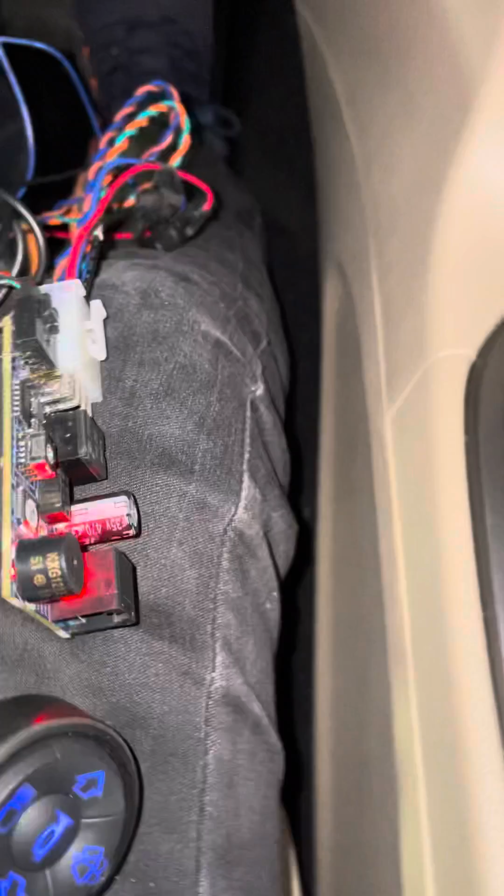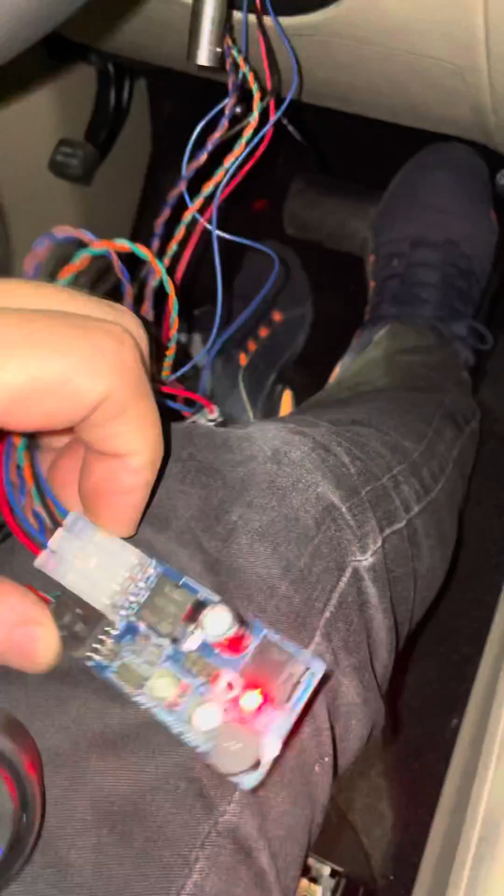Here I'm going to show it. Today it's installed in the Jeep, which is basically the Jeep Grand Cherokee, Pacifica, Dodge Ram, and many types of these cars based on this. What I'm going to show here is the CANbus module. It's a very small one, tiny little box, which includes hundreds of types of cars. And this is the box, very small, like a matchbox.

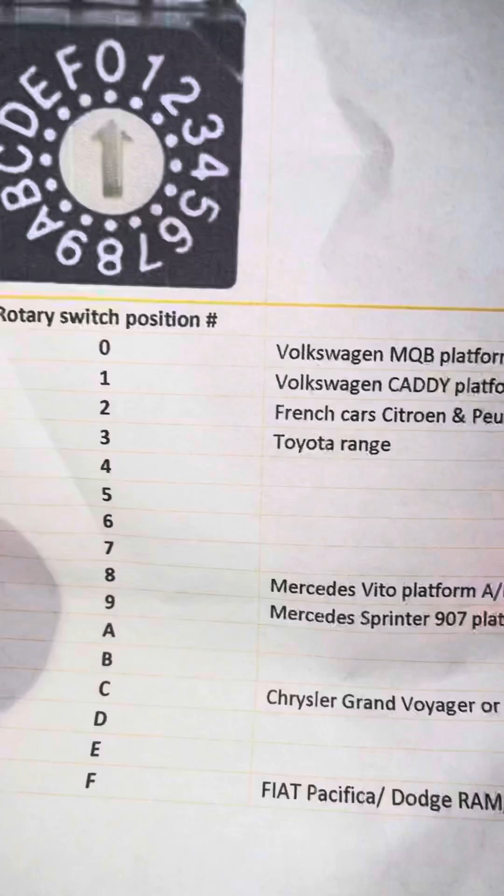What I'm going to show also is that you need to select here. In this module there is the rotary switch, and the rotary switch has 16 positions from 0 to F, and by using a standard flathead screwdriver, we just insert it here and select. Now the selection is according to a list which was made. This is just an example. So basically this is the rotary switch on the board, and we can see the numbers from 0 to F.

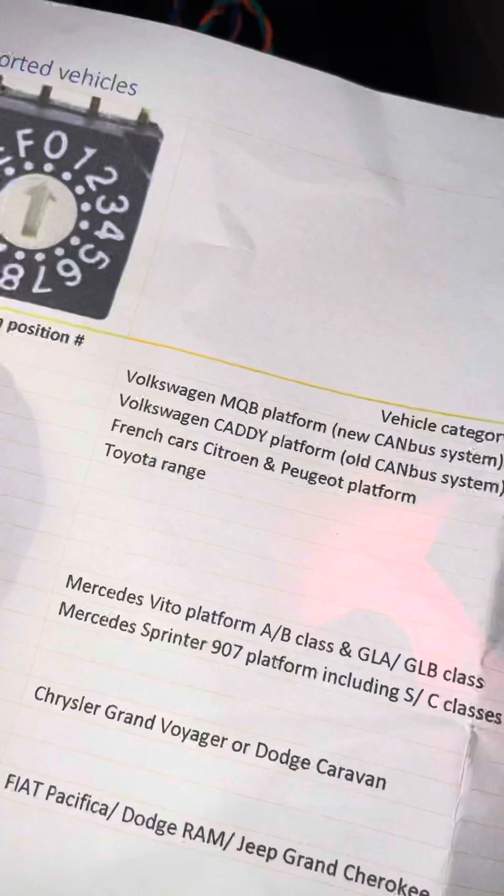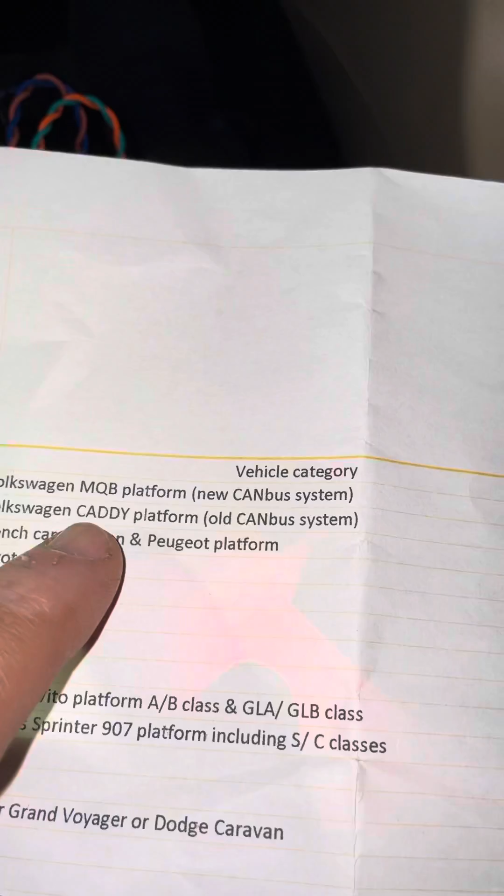So if we look at number 0, by default, the manufacturer default is Volkswagen MQB platform, which is basically thousands of types from Volkswagen. Or the same thing here for the old version of Volkswagen, which is the Caddy platform, as we call it, and this also includes thousands of types.

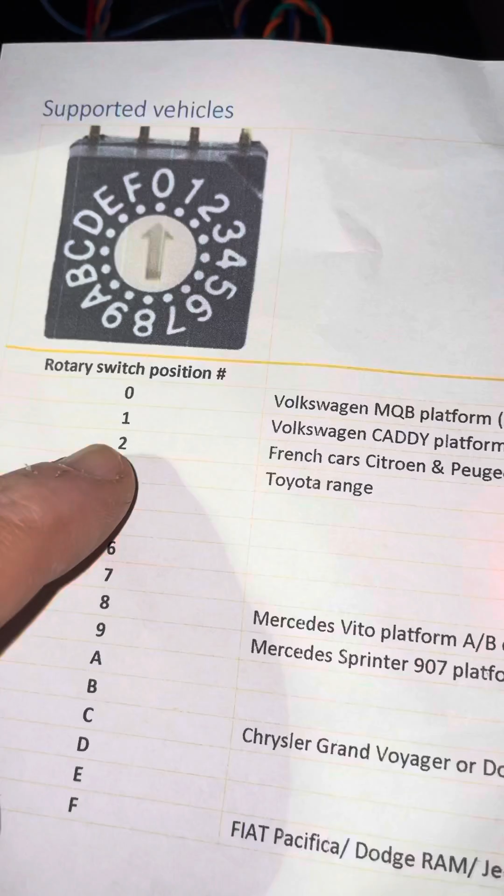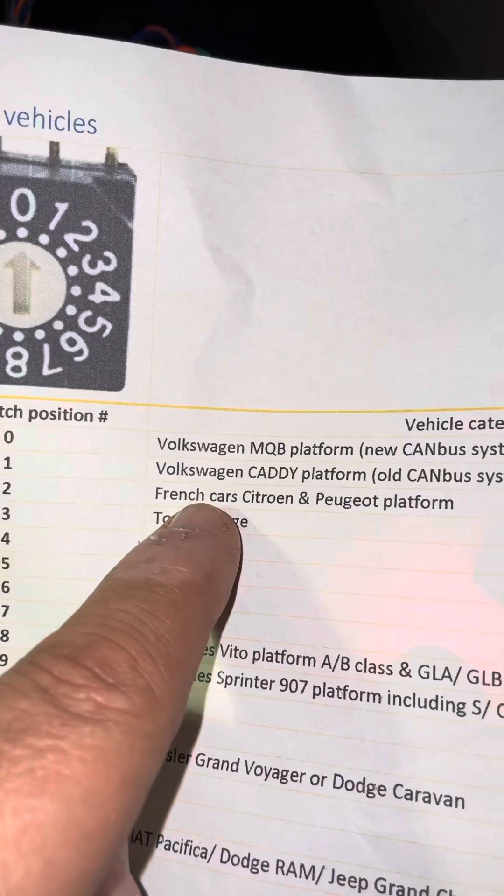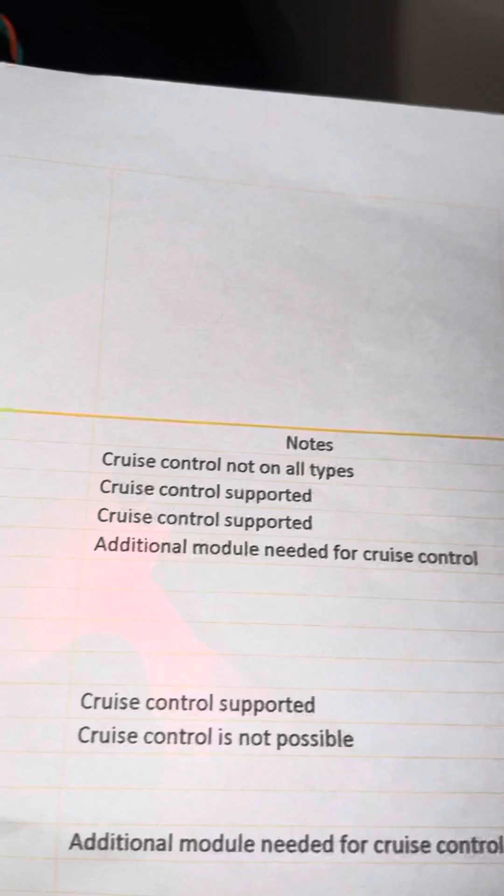For example, number 2, if we set the rotary switch to 2, this supports all French cars and some of the new Toyota, like the new Toyota Pro-Ace and Pro-Ace City. Number 3 is Toyota, but this is a different CANbus than the Toyota, and these are based on the French cars. French cars support almost all cars starting from 2008 until today, but they are all the same, and even some functions, according to the list, like cruise control, are supported in the module.

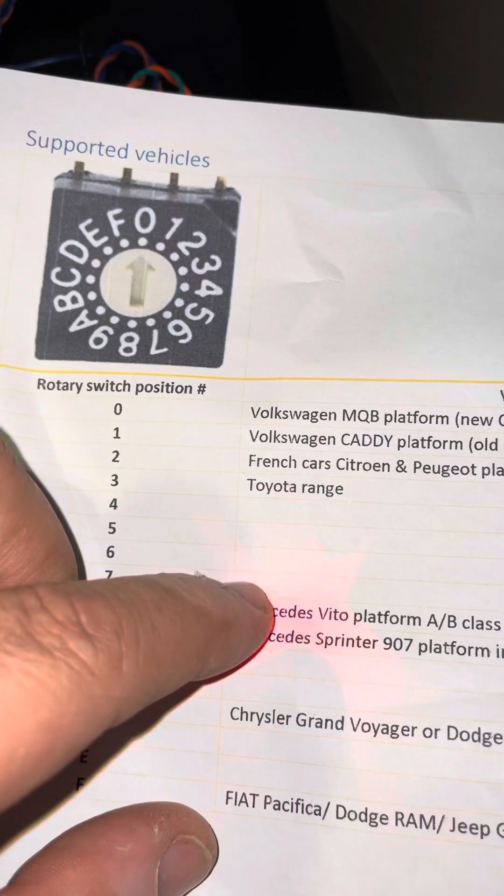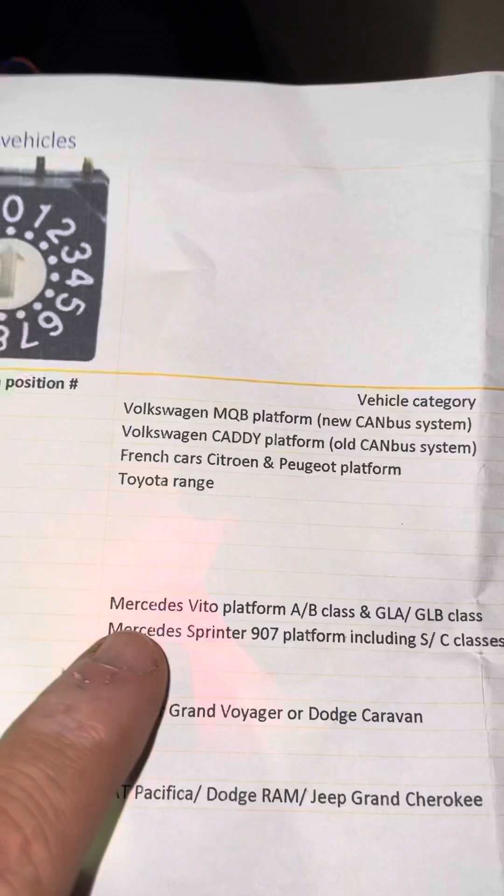If we continue here on the list, these are future ones which we will have to wait and see what's going on in this car industry. And if we look at number 8, for example, in Mercedes, it's the Vito platform, A, B class, and GLA, GLB, and there are loads of cars based on these platforms, like the Vito platform.

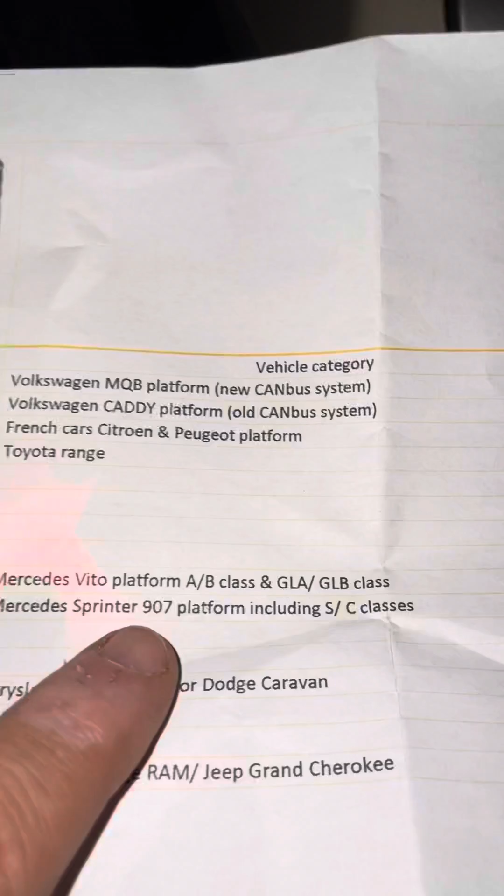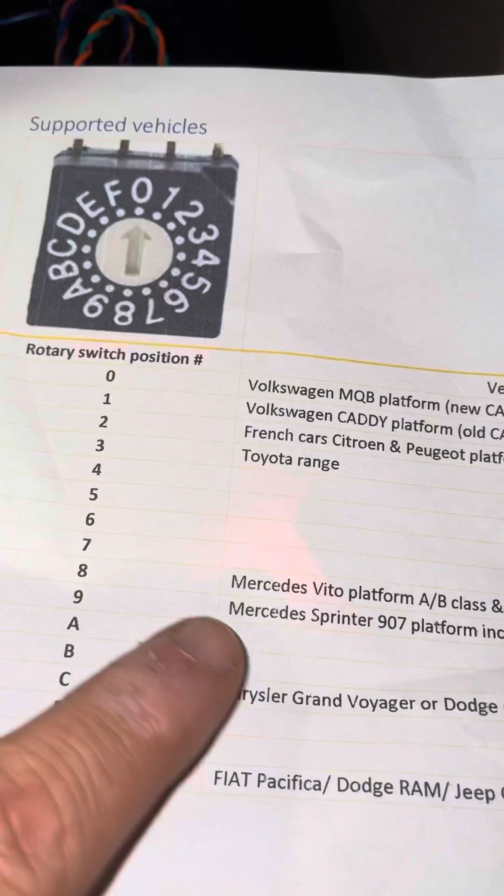If you look at number 9, all these are supported in this little module. Number 9, for example, supports the Mercedes 907, the Sprinters, the S class and the C class, like 220, 300E, and all these classes. So all these are supported here, which is basically loads, almost all cars from Mercedes, in one little box, in this matchbox.

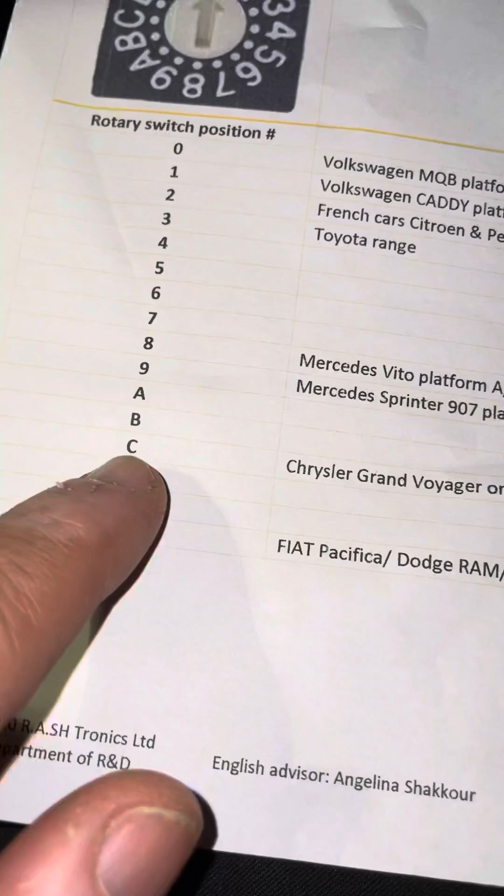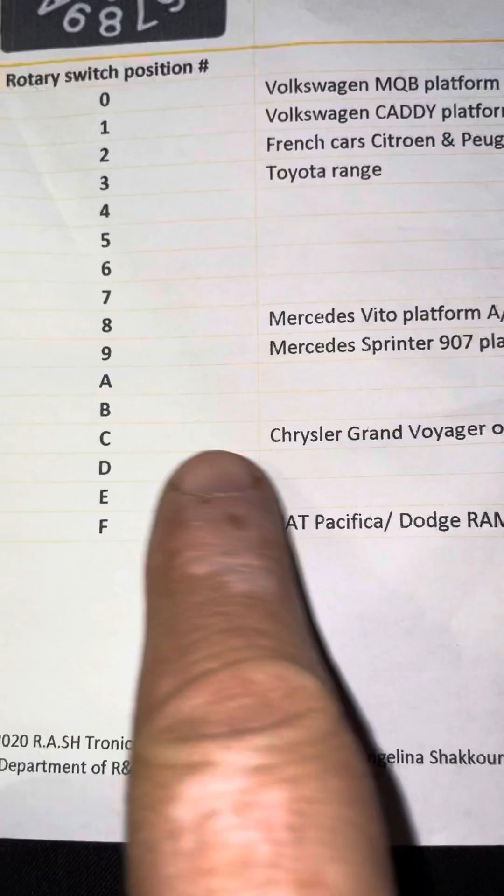If we continue here, if we go to number C, for example, all these are also empty and future ones. The reason I did this is just to keep room for other cars that are coming and will be introduced in the future. For example, on C, Chrysler Grand Voyager or Dodge Grand Caravan, so this is the only one because it supports a different platform than all the rest.

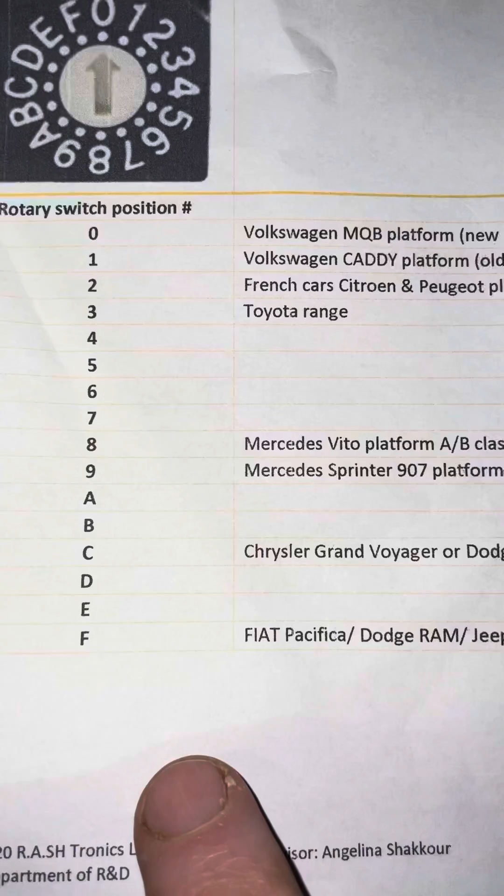And then we go to F, which is Fiat Pacifica, Dodge Ram, Grand Cherokee, and of course there's a manual that supports all types of cars and the specific wiring, or how to identify.

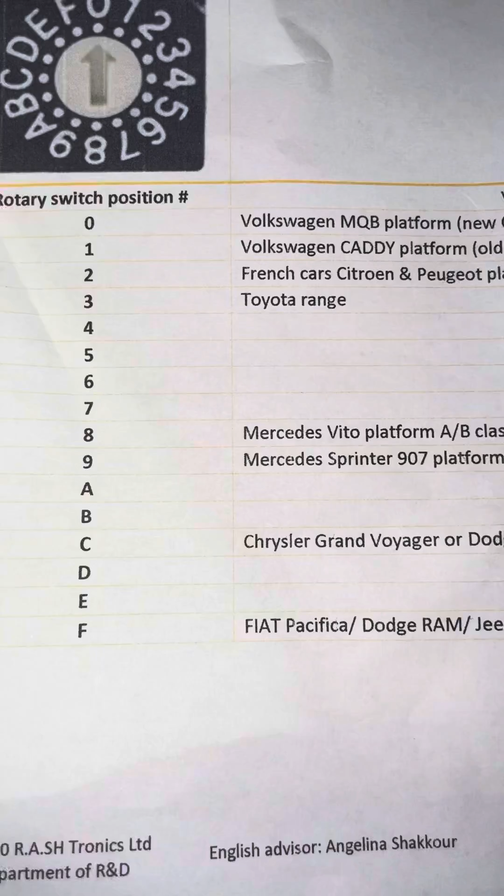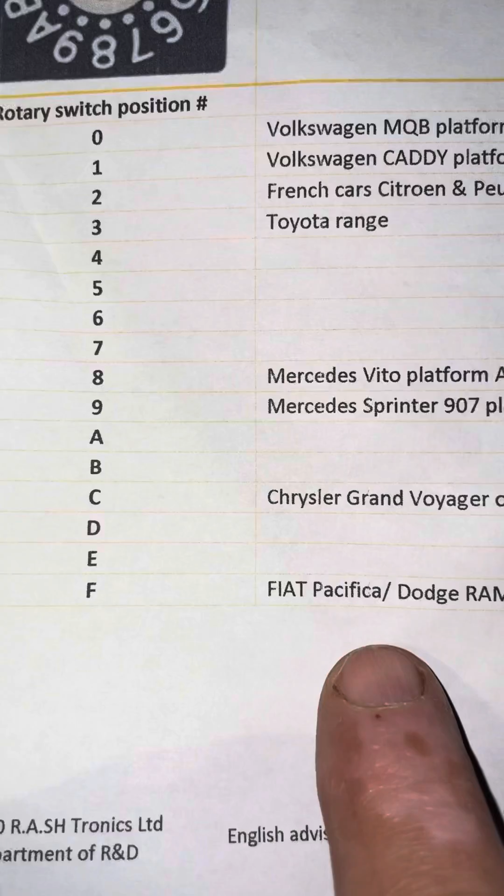Now the good thing about this is when you land on a car that you have no idea what to expect, like for example a Dodge. So you are having a Dodge, you can either select C. If it doesn't work, then you can select F. That's the easy part. So you can try either way.

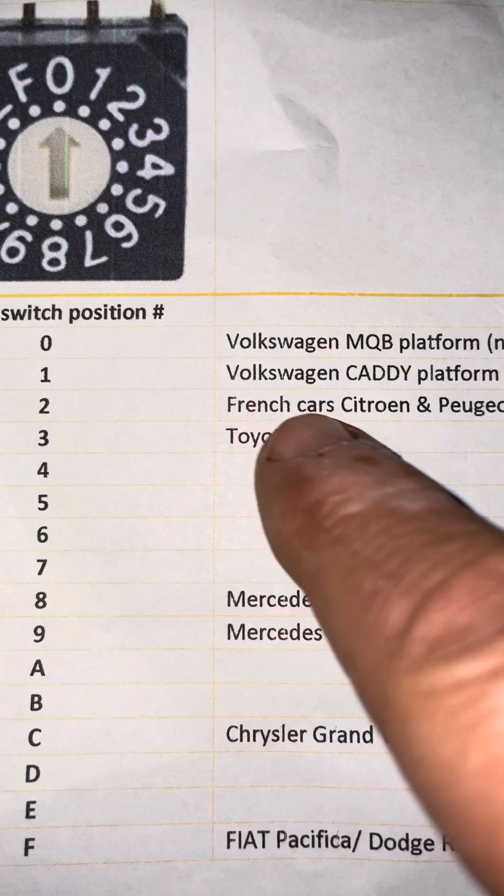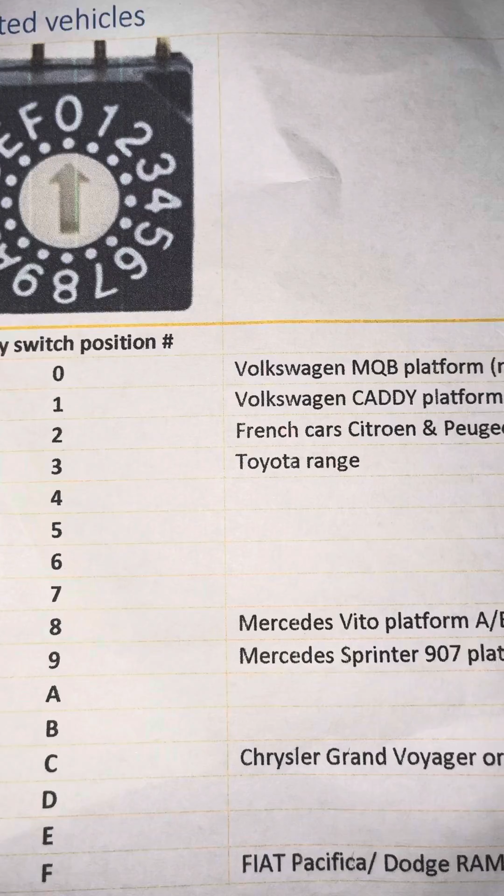For example, you can say if you have a Toyota, so you don't know what type. So when you identify that it's CANbus, you can select either French cars or the Toyota range. The Toyota range is a huge range, like Pro-Ace, Toyota Hybrid, Toyota Corolla Hybrid, Toyota Corolla, the standard one, RAV4, and there are Lexus, for example, and many types from Toyota based on this platform.

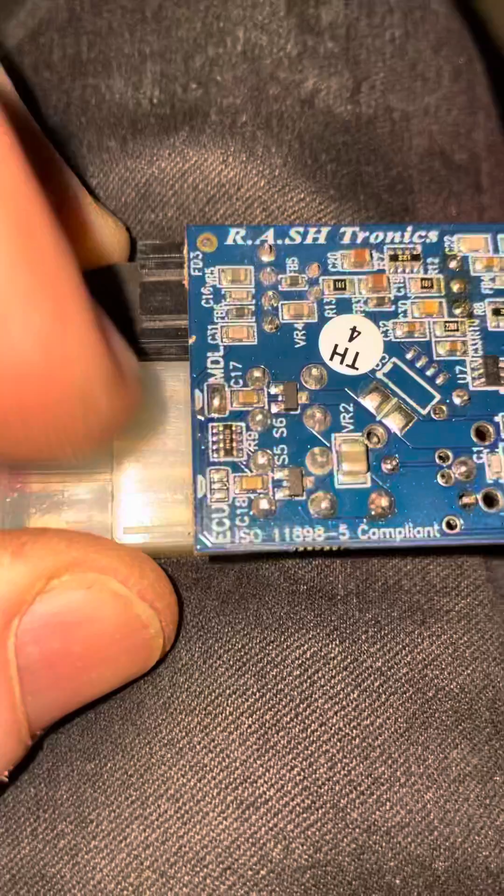So what I'm going to show also here, this is the module. Once it's set up, the difference between the CANbus types is just by selecting the switch here, and on the bottom we can find the jumpers that can terminate the CAN bus, which are critical ones.

So here we have the MDL shorted in this Jeep, but in the French cars, both are open. Let me try to zoom in. Okay, so this jumper is open, for termination, and it's marked ECU. So the CAN bus going to the ECU side has no resistor, because in the factory lines there is a resistor, and here we have to add the termination line on the MDL, so it's marked MDL. For example, in French cars, both are open, so we have to open both of them, and all this appears in the manual, so there is no problem and it's well marked, so you don't forget.

So if it doesn't work, basically you have to check yourself if these jumpers are correct, if the MDL is shorted. For example, in the Mercedes Sprinter, the ECU is shorted and the MDL is open. So this is very, very versatile. You have to use the soldering here, and these are very small points.

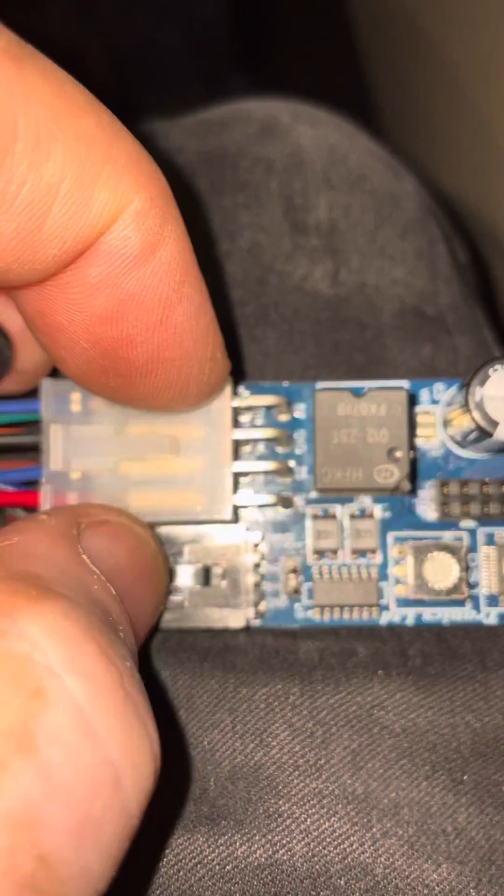This module has an input device here. This is the LIN input device connector, and this is the LIN module. So this can indicate, and you can use the wipers, horn, and all these functions.

Also, you have the RJ12. Basically this is the 5 pin connector on the back of the box. So you can use 5 low effort switches to do the turn signals, wipers, horn, like foot switches, elbow switches, headrests, whatever you want to do.